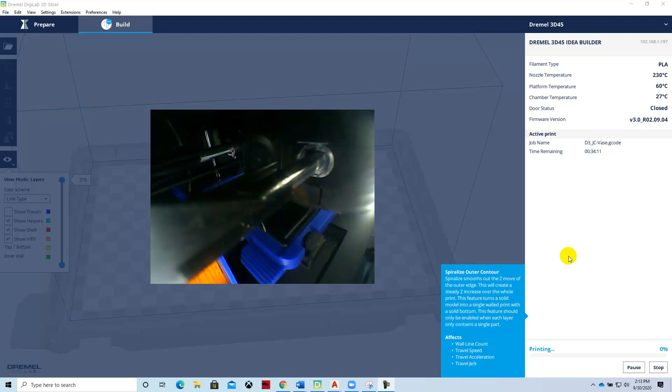Hi, Joe Cirone. Just a quick video on the Dremel 3D printer. This is the beginning of the print for the vase, and we'll be using the spiralize outer contour, which smooths out the Z move of the outer edges. It actually kind of creates it like it's a cup.

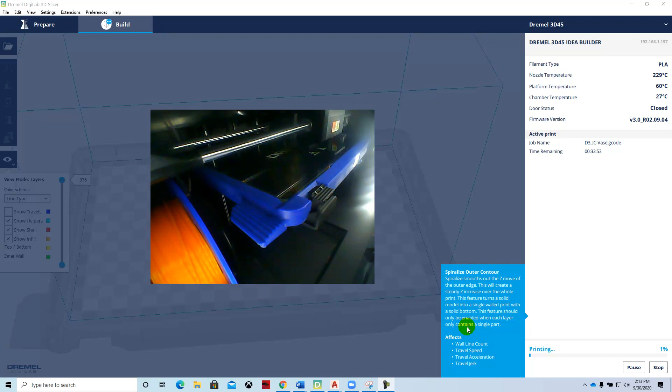And so if we were to take a look at this, let me see if I can stop that music.

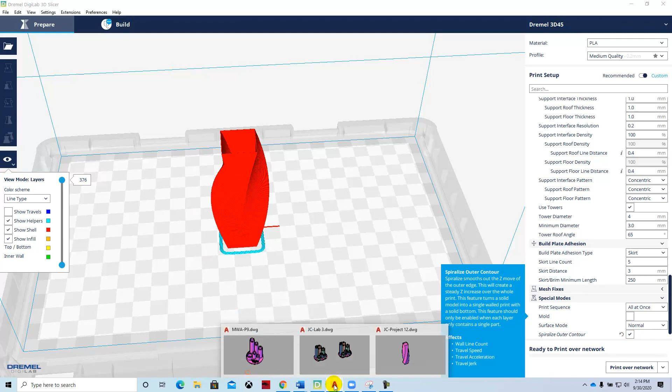So as we look at this project, what we did was we modeled this in AutoCAD, and you can model this in SolidWorks as well. It's just a basic shape that's been extruded, or in this case, this project has been modeled using the loft function, and we can go through that at a different time. But essentially what we did here was we exported the file. We just made the shape. We did not shell out the part.

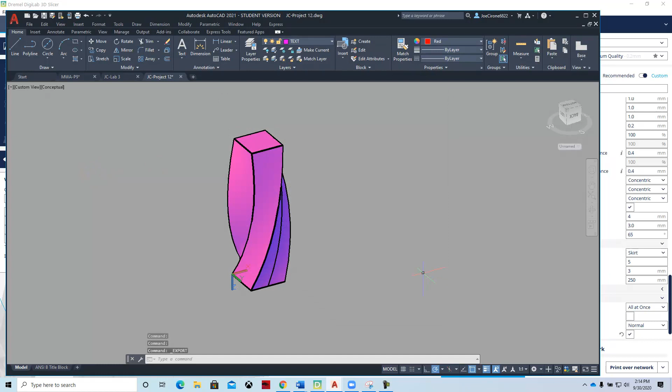After we created the CAD model, we exported it to other formats as an STL. Once I exported the STL, I opened up the Dremel software, and then I opened the file and placed it on the pallet. Once I placed it on the pallet, I set up the spiralize outer contour value. And I can show you how that works. Let's take a look at our build.

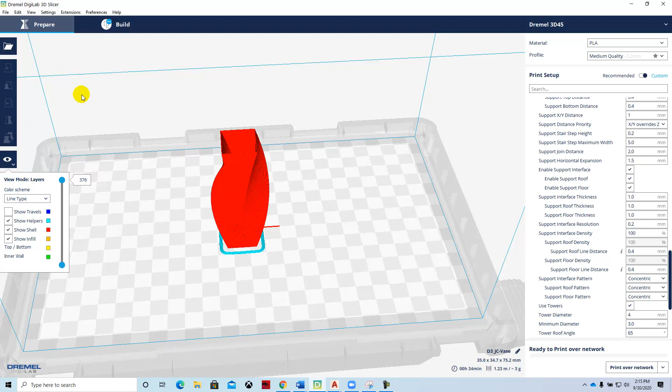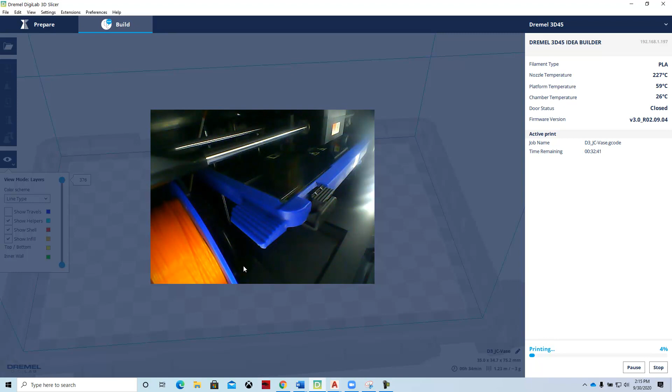And so we're running orange PLA, polylactic acid. That's a plant-based plastic material that's biodegradable. I don't know about its ability to not leak water. I would think we may need to do some post-processing on that, where we spray it with some type of paint or a primer that would seal it, probably a sanding sealer.

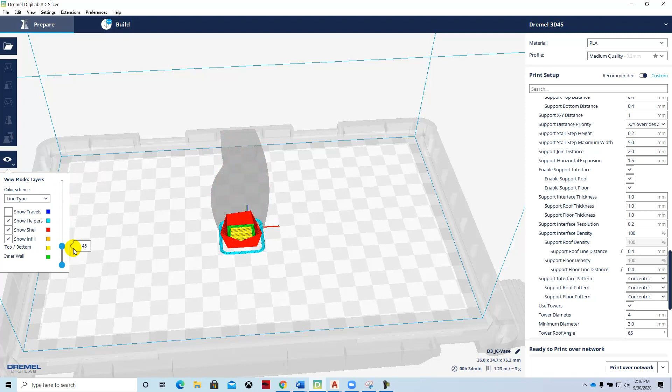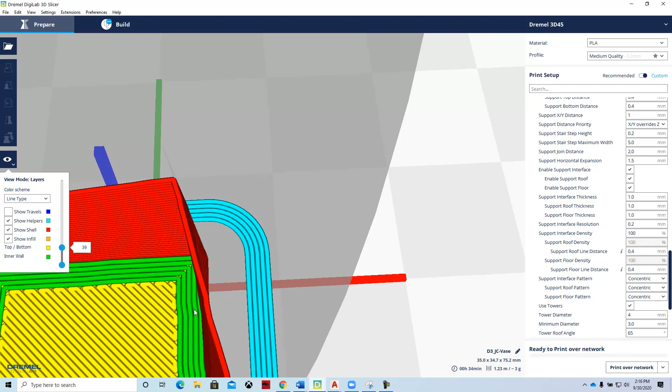But with that said, the part's underway being printed, and the way this part looks, if we go through and we slice it, it prints a large volume very quickly of 376 layers, and it just prints one layer at a time, and then it goes to the next layer, to the next layer. And so if we look closely at our layers, not sure what happened there. Let's reslice it. Oh, I think there we go.

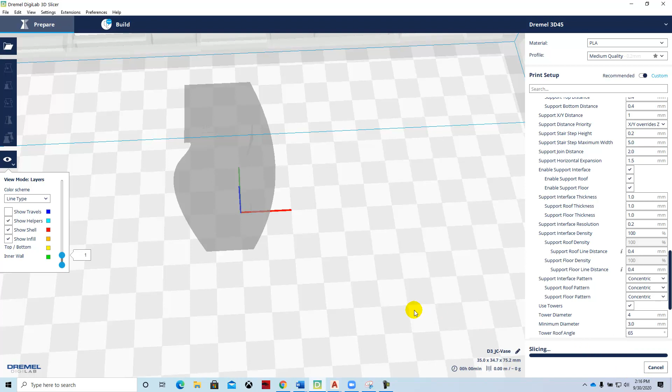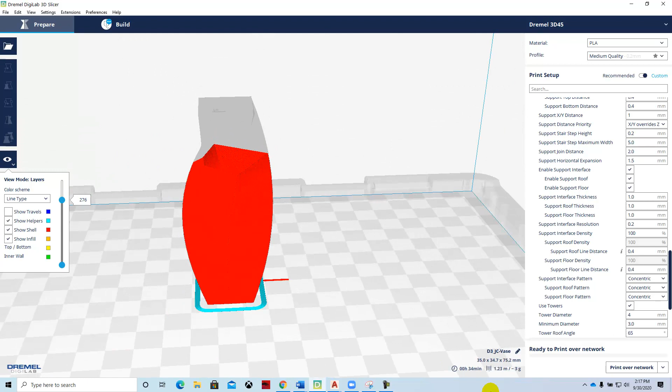So as we look at the model, we can see the layers. We're setting this at medium quality, and it will print very quickly, 34 minutes. We did scale this down a little bit so that it would fit into the machine and print within the amount of time that we have. But essentially, we're going to print 376 layers in 34 minutes. So about 10 layers per minute, which is an excellent speed for printing these out.

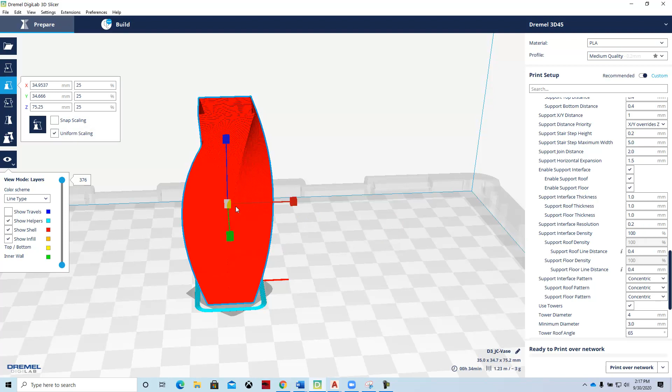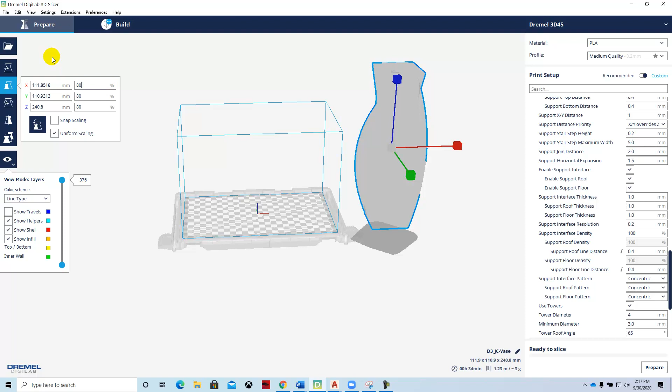I'm going to pause the video. Actually, let's just redo this. Let's delete this out. And then when we import the file, I'm going to say open, and I'm going to get my vase. And the file is too big for the volume of the printer, and so I'm going to click on it, and I'm going to scale it. If we scale this, we'll start at 80%. Still too big. We'll go to 60.

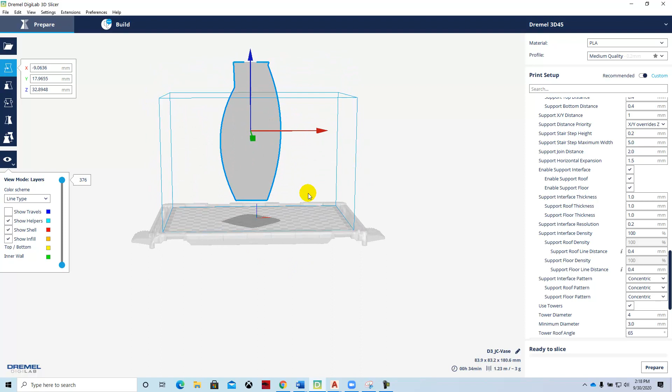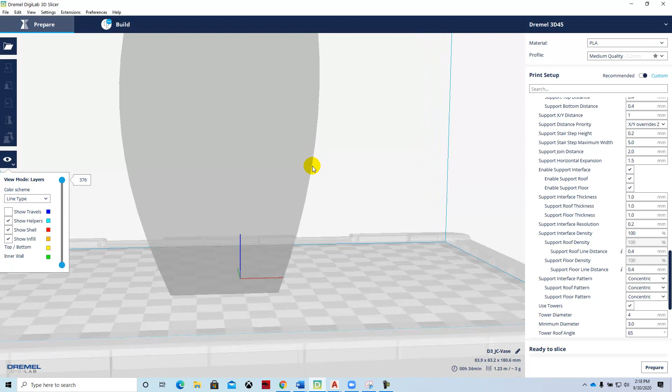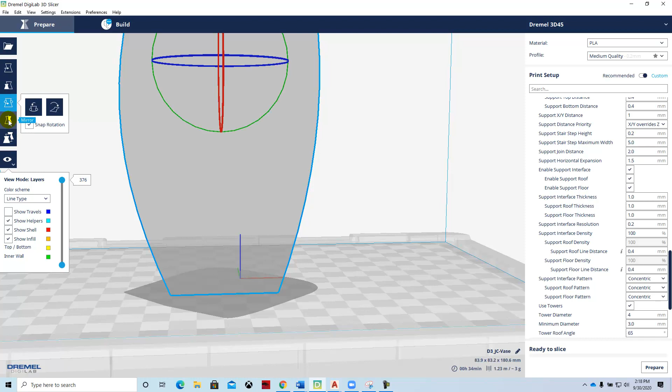And then if I move it, it's a little tricky to work with the mouse on this, but it should grab it once it gets close enough to the part. So I'm going to drop it down, and I'm going to see if I can lay this flat. All right, I think it is flat. That's why I'm not getting that information. Maybe I'm just missing something. Let's see what happens when we prepare this. No, I don't have it flat.

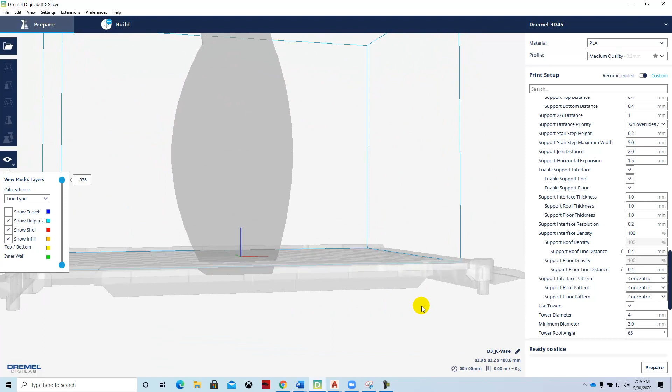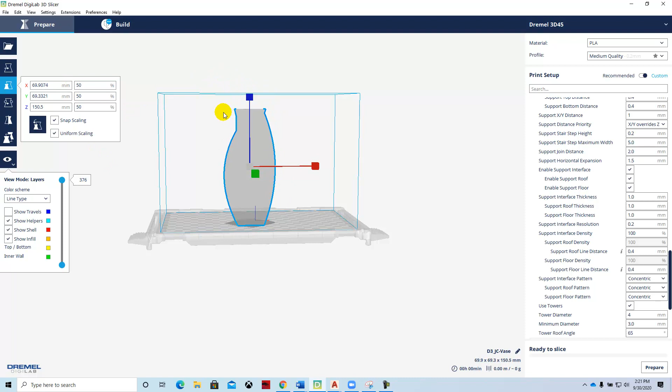So I believe I have this located on the plate properly. And the reason that it's not snapping to the plate is that it's too large. And so I have to scale this down a little bit more. And then I should be, there we go. And so now it's attached to the plate. And so if I click off the model, we can set up our quality for that.

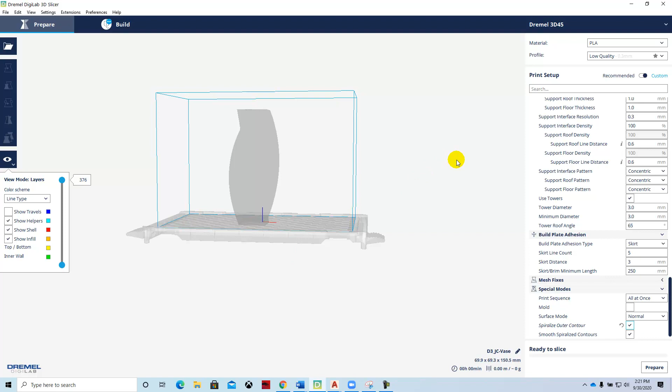Let's go with low quality first and just see how quickly we can create it. We're going to leave all the settings active, and we're going to go into the special modes, and we're going to enable spiralize outer contour. When we enable that, we can then prepare it. And so this part will fill the entire volume of the 3D printer and print in less than an hour. If we take a look at our layers, we can see that it's going to print 500 layers in about 1 hour.

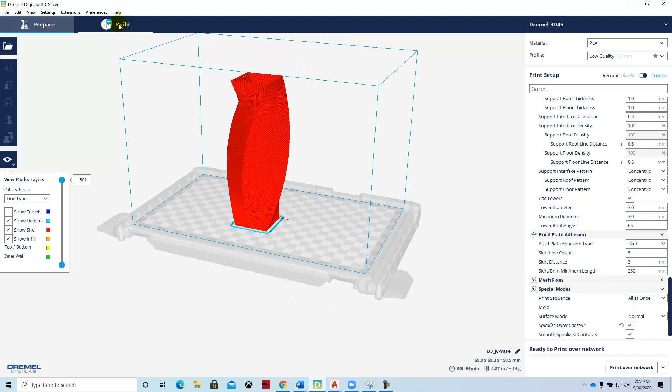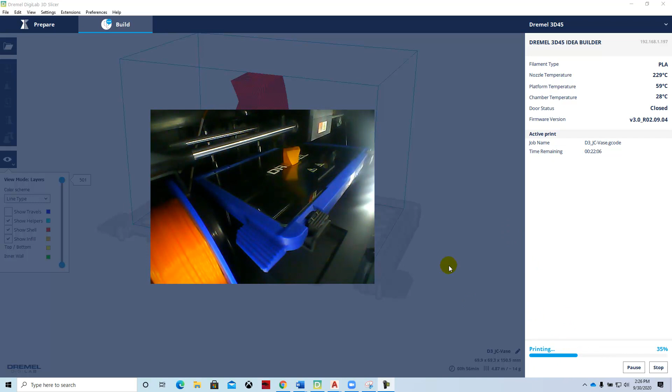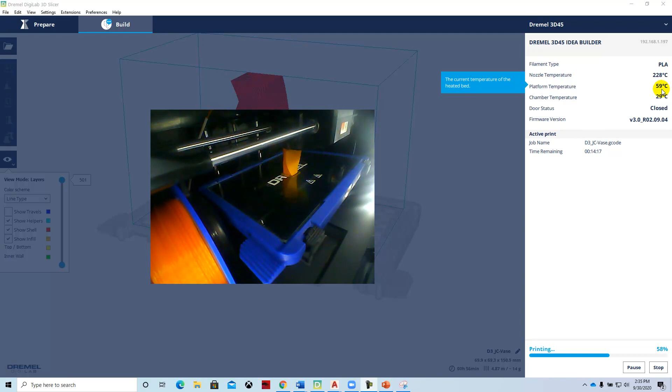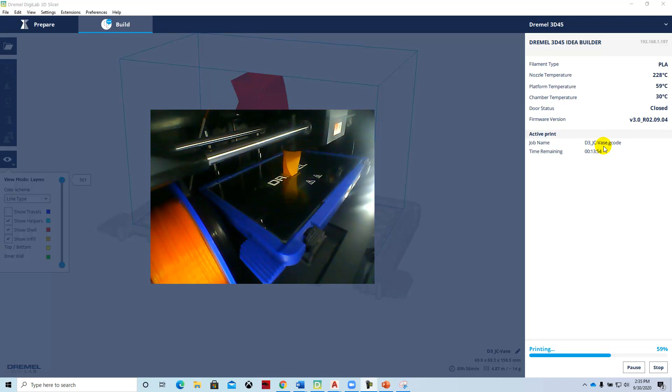Okay, just another update. We're 58% complete into our 22-minute build cycle, so we're about 12 minutes into it. We're running PLA. The nozzle temperature is 228 degrees Celsius. It has a heated platform or build plate, which is this blue plate, which is 59 degrees Celsius. And the chamber temperature is 30 degrees Celsius. The doors are closed. If I were to open the door, it would give me a notification that somebody had opened it. And this is the firmware. It tells me it's actively printing the vase G code, and the time remaining is 13 minutes.

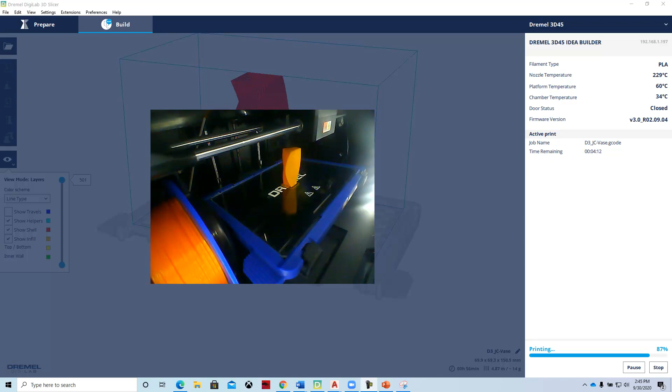And here's our latest update, 73%. So here we are at 87%, and we should be done in about 5 minutes. Okay, so we're at 95%. We have about a minute left, and I'm going to let the video continue until the part is completed.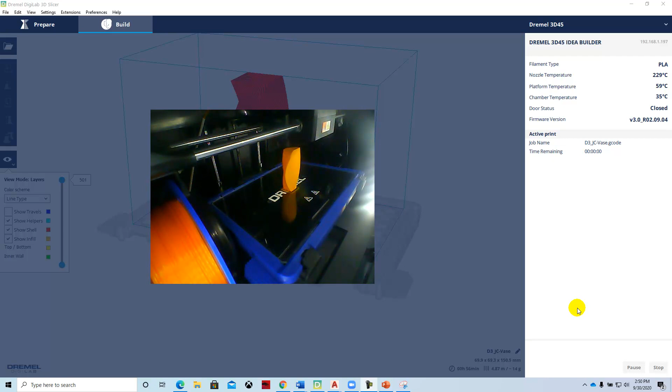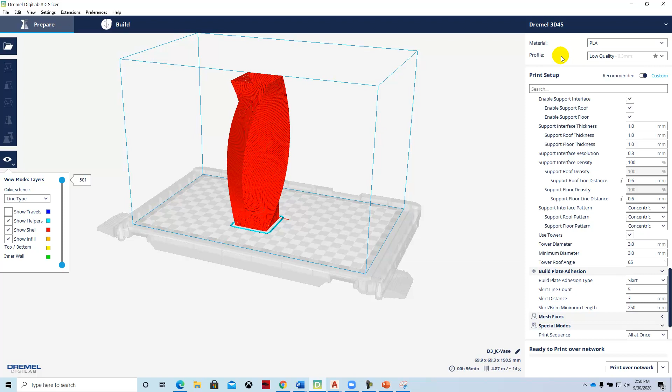Okay, so that completes our build of our 3D printed vase. As you can see, we can manage these 3D printers with our slicing software. The Dremel 3D45 is set up, and we can hook it up to the network, which I've done, which allows me to have camera view to it. We also have the ability to use the Dremel Print Cloud, which we'll take a look at in another video. The Dremel Print Cloud allows us to do the slicing online and then actually print to a remote 3D printer.